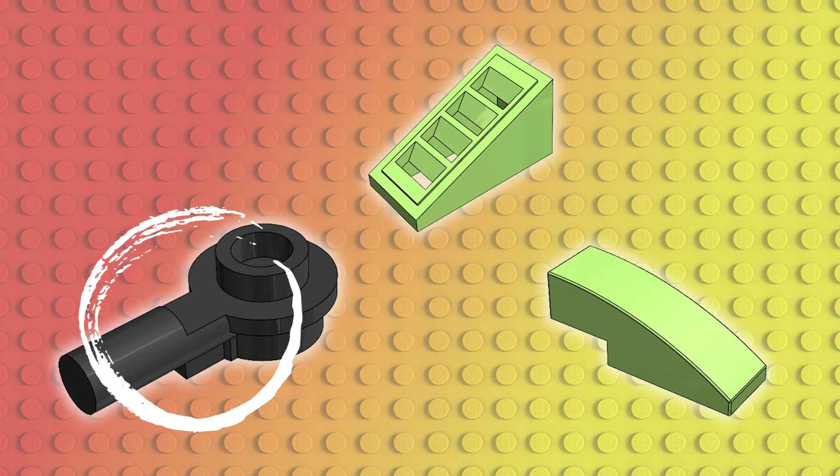Now in this lesson, we're about to tackle 3 parts. We have the black bar with a round plate and a hollow stud, a curved slope part 3x1, and another slope part, this time with a grill. I'll take you through how I modeled each of these components, 2 of them starting from scratch, and 1 with some simple changes to the starting geometry, but all the details after that completely fresh. All right, let's get started.

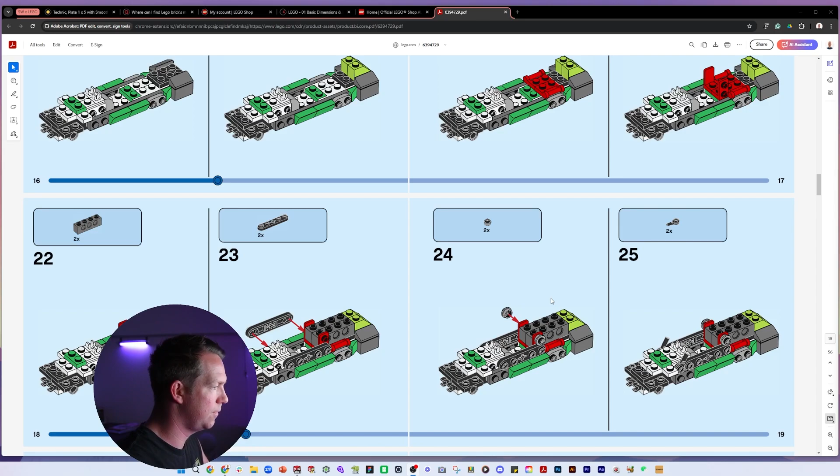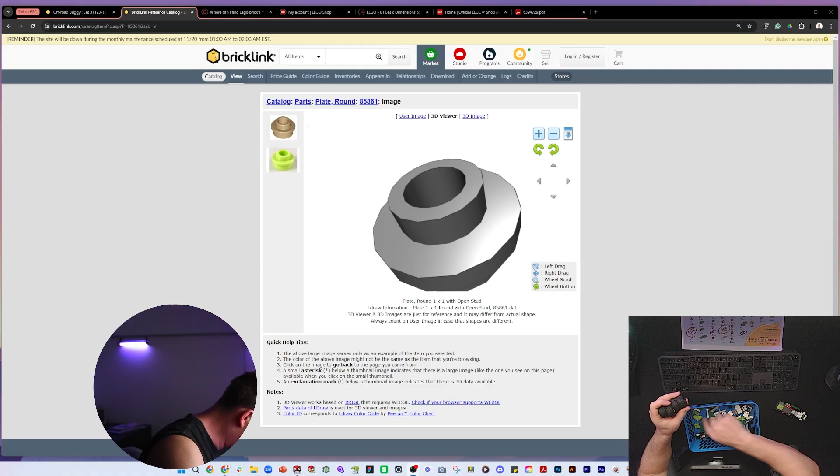Let's keep going, we're up to number 24, first time we've seen that kind of part. 6168647, plate round 1x1 open stud. Interesting, 1 by open studs, that's going to be the same type of part I think. Let's have a look here, small grey part, kind of clear, difficult to see. Still got a lot of parts to make. Good, all right, so we're missing a part. This one, I thought we had it originally, but this step 24, we'll have to go back through that big Lego pack and see where it is, because it's not here.

So we move on, next part, 25. It's a bar 1L, 1x1 round plate with hollow stud. I think we'll create this one from scratch, so let's get into it.

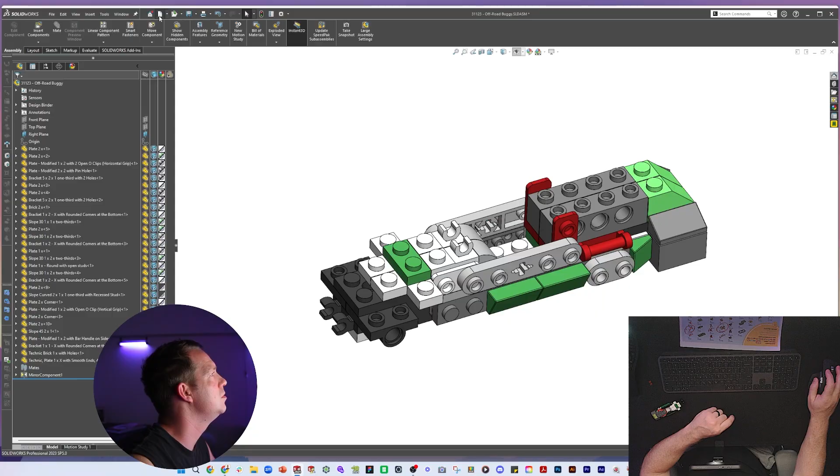I don't think we can use anything around it. We will just have a look at some of the details, we will see it's quite small. It's a round plate, it's got a normal brick on the top, it's got a little level here. And then it has a round end and flat join there with a little hole for a sink mark and a rib on the bottom.

So you can even see the part numbers on the inside. They are tiny, can we zoom in? Well, even that's enough to see the detail. Let's give it a model.

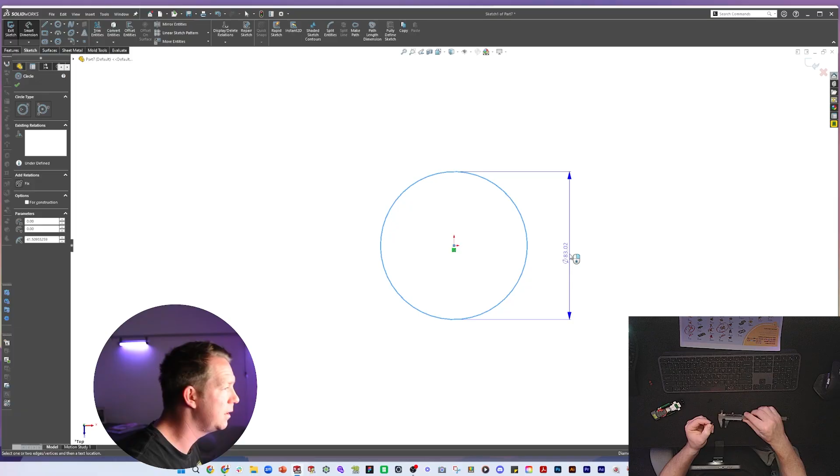So let's start on top plate, and we will use calipers to get the outer diameter right. Let's assume it's going to be 7.8 before we measure it. 7.8. So we drop that, 7.8. Now that's at the widest point, okay, but the widest point is only at the top, the top, the middle level. And the height of that is the usual 3.2.

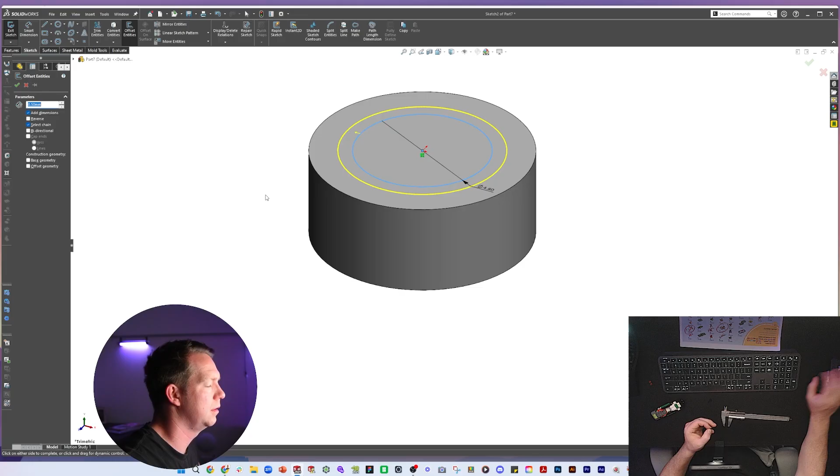So here's what we're going to do. We're going to go up 3.2. Let's do the usual brick element on the top. That is going to be 4.8, offset 0.8, extrude up 3.2. Was it 1.6? I forget. Let's check, 1.6, apologies, 1.6.

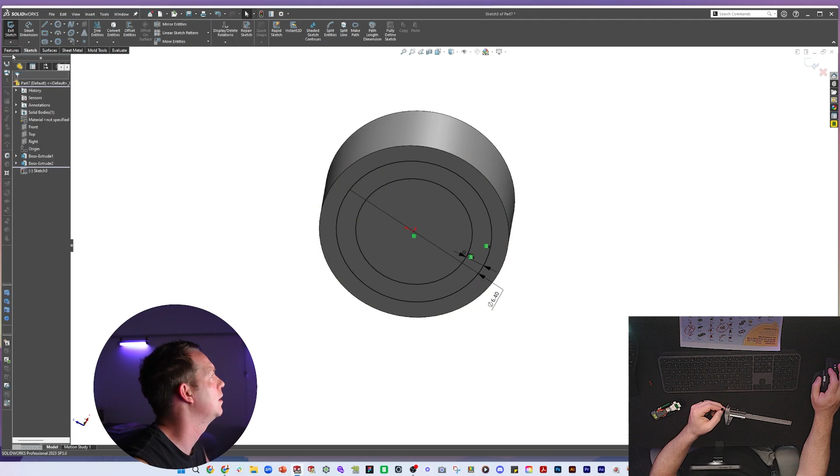Okay, now let's thin this out on the bottom. So the diameter of that round part is only 6.4, does that make sense? Yes, 6.4, and wall thickness, usual 0.8. Okay, so we're going to do some flip side cut here. We're going to go up to that surface and offset by, say, 1. So we will go offset from surface, 1, it's going to cut the inside and the outside for us at the same time.

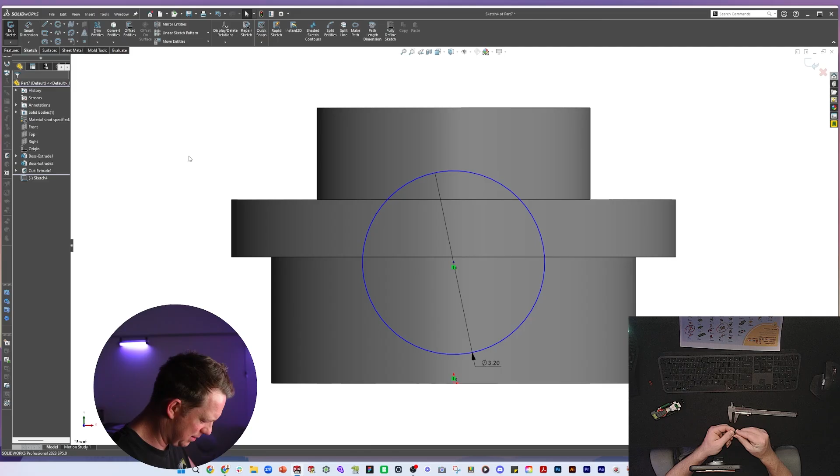Okay, now we'll do the additional round part. It has a diameter of 3.2. Don't know its exact height position, and we're going to struggle to measure that. Looking at it, we'll suggest it's kind of in the middle, so let's use a midpoint and drop that right in the middle. Now we're going to extrude that all the way out. It becomes 15.8, yeah, 15.8, that's neat, 15.8 from this very end here.

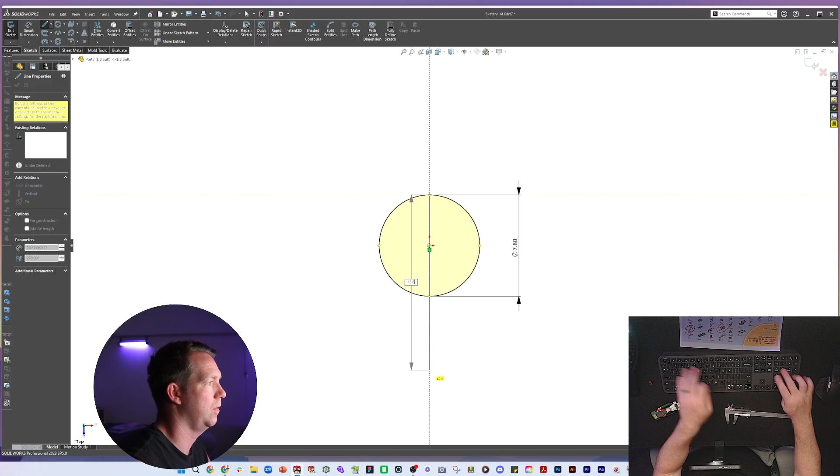So that's going to be a hard one to dimension. But what we can do is on this top plane, do a sketch to help us, 15.8, and make that for construction. So then when we do this extrude here, we can actually start it from the vertex, the end point, and we can go change the direction and go up to next. And I'll just go all the way in and then merge, right? It's a very neat way of just going from the outside, and now we can do the rest of the detail that we need.

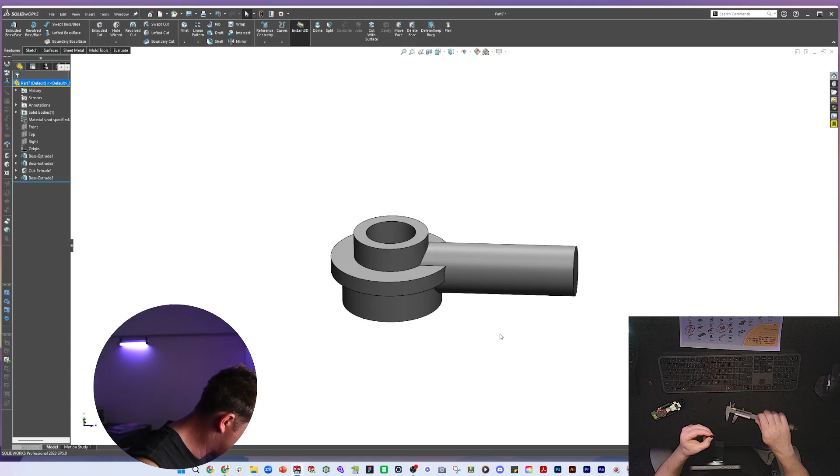So the flat section, for instance, on the top, that starts at what looks like 5.8 from the end. So we can do a sketch here, convert that edge, and draw another rectangle here with a dimension, 5.8. And let's use a contour selection. So this area, I'm going to go up to this surface.

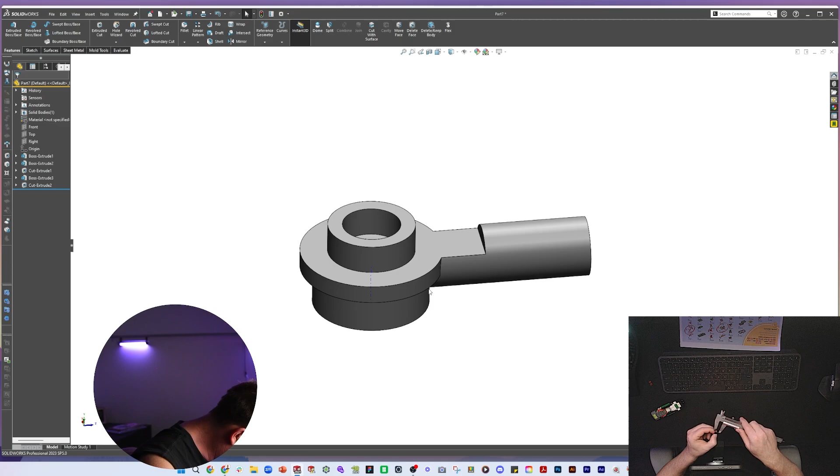Very nice. Here on the bottom, it's solid, except there's another little rib, very small. Rib is 1.8, 1.6 millimeter, let's say. It comes out a tiny bit, and there's also a little straight section. So on this bottom section here, let's draw that rib in. And what do we say? 1.8.

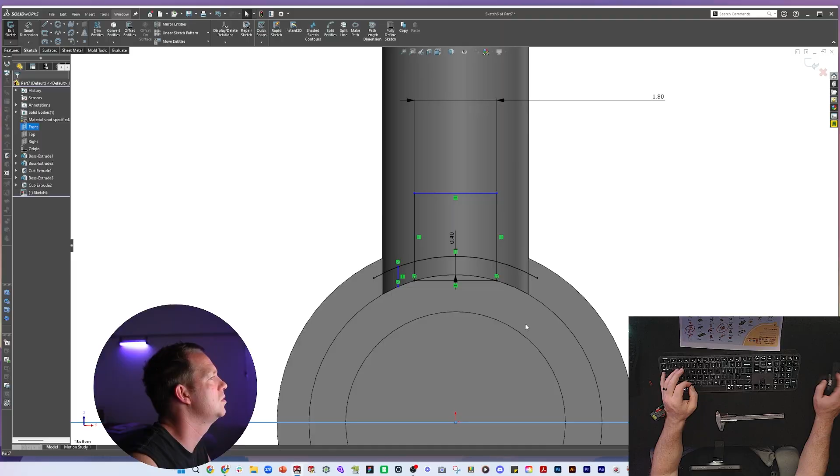Also a little bit of a thicker section just in the corner. This bit, let's offset that, 0.4. That's about right. And down here. These dimensions are too small to measure accurately, so instead I'm just going by eye because I want to get an approximate appearance.

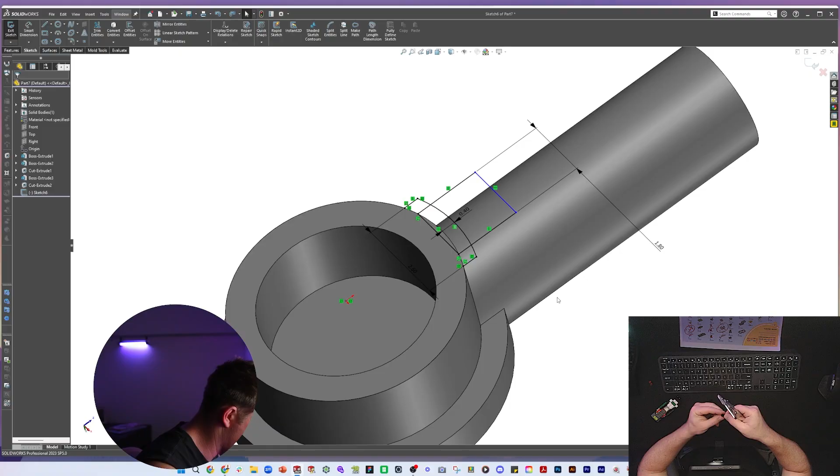Some edges that we don't need. I do want, there's a sketch there. There isn't. So I'll just add a round that goes through the middle. Don't like it and delete one. I'm just trying to do this without losing all dimensions. Close enough to 9.2 on the back side of this one. There we go, fully defined.

And let's just select some contours to use. This one, this one, this one, this one. There you go, go down up to next. Very good. All right, let's save. Plate one by one with open stud. Great. Save and insert. Those ones are going here.

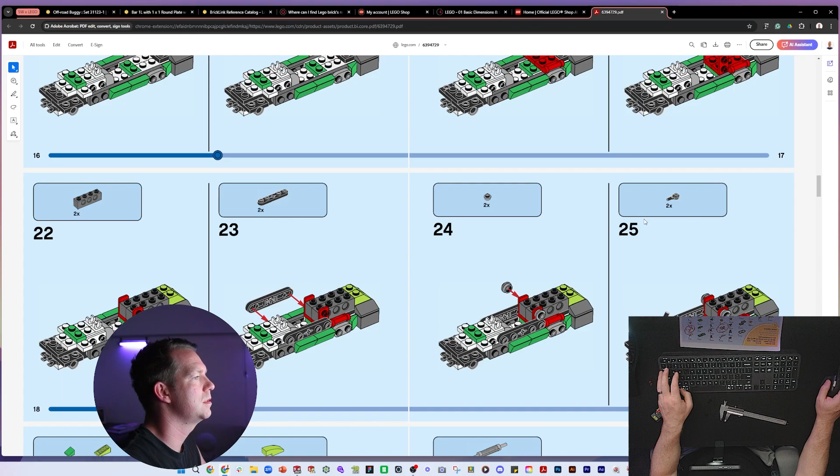Oh, next. Hi. Are we at halfway? No. But we're getting up to some repeat parts, so that's cool. Two of those green ones. So it's these little ones here. They're going on those corners.

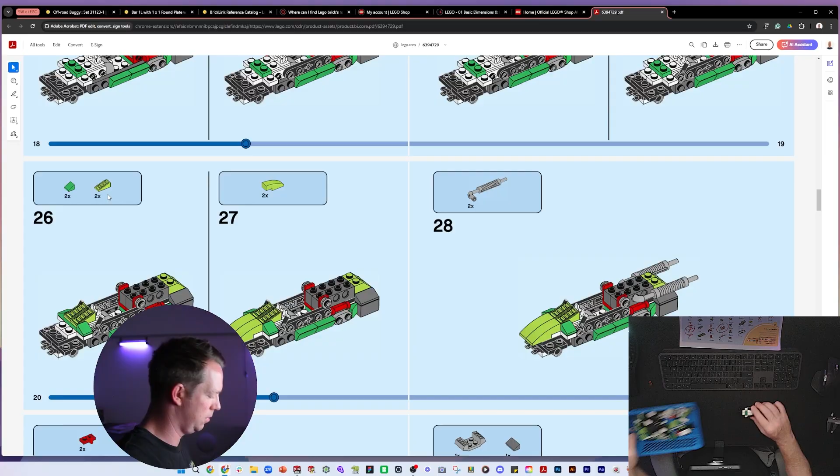And angled one with a lime slope with grill. Look, cool part. Definitely very cool part. It's got a very slight lip raised section on the top. It does have a similar shape around the bottom. You can see there's a couple of kind of pips on the inside, just raised areas. A few fillets on the outside too.

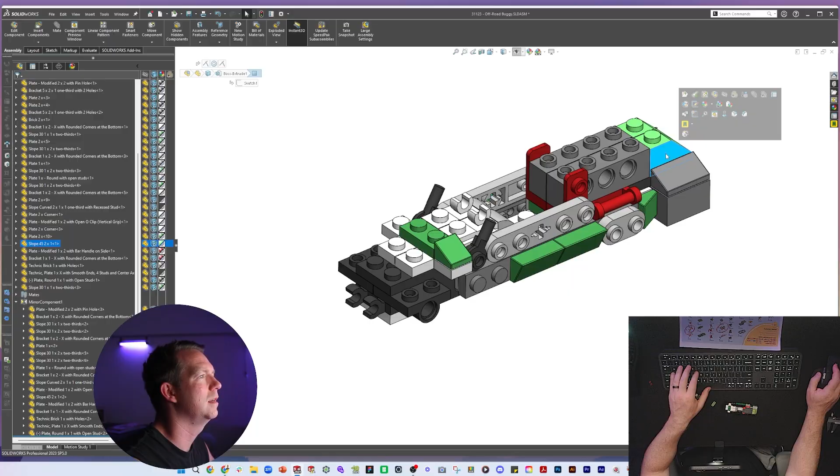Now this one, can we start with the other two slot part? Probably can, but it'll be completely different to the eye. So this one, I'm talking about this one here. It does give us the dimensions, so we can start with that. And we save a new file. This is called slope 18. Cool. All right, save as copy and open, and let's roll back to get the shape right from the start.

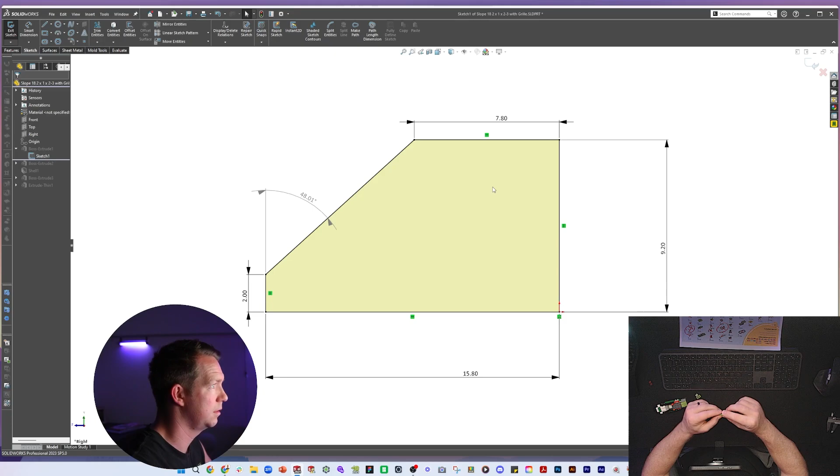So it's going to be this one here. Now our 15.8 is correct. Our front edge at 2 millimeters, it's going to be correct. This top face, which no longer has a flat section, that is going to change. So we're going to remove that and just join that one up there. That is pretty straightforward. Press OK.

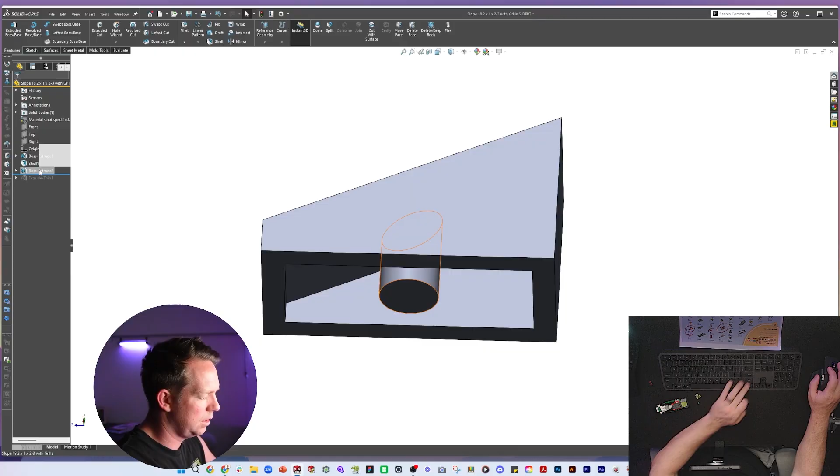Now in this version, it had a boss extrude here. We're not going to use that. We will do a complete shell and then do some cuts on the top. So it's a shell. Good. We do not have this detail. We can remove that. And we don't have this detail. We can remove that. All right. So let's start from the top.

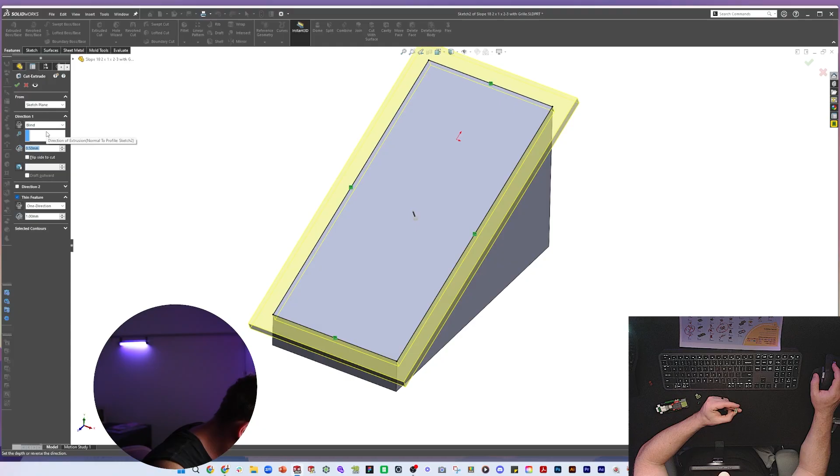Right off the bat, there is a very thin wall section that goes around the outside. So let's do a quick convert and do an extruded cut with a thin feature that goes approximately the distance that we want. And then our depth is going to be very small. I'm going to say it's only 0.2. I'm actually going to make this mid-plane so we know we cut all the way around. Okay, now we can do our slots.

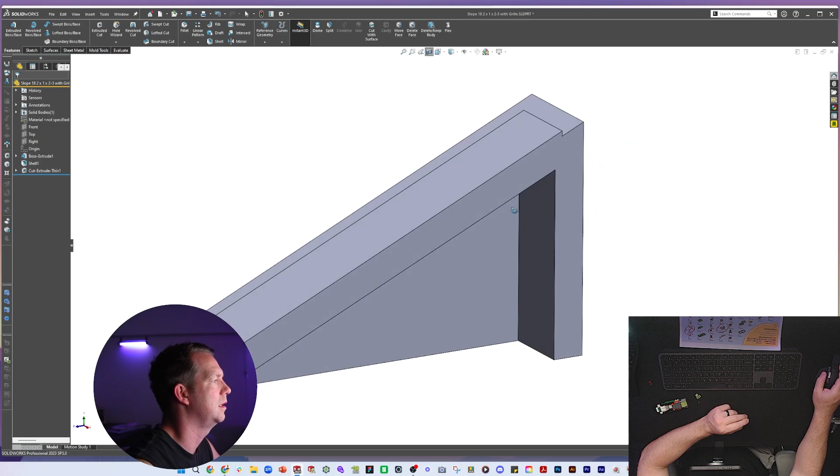Now our slots are going to go through the roof. And the other thing with my cut extrude, I need to change the direction so it's coming down straight like that. Okay, cut slots. These slots have an interesting sort of angular detail. We'll do a section view here. So they cut through at an angle like this and then come straight up along those lines. We're going to repeat shape and just move the sketch to match.

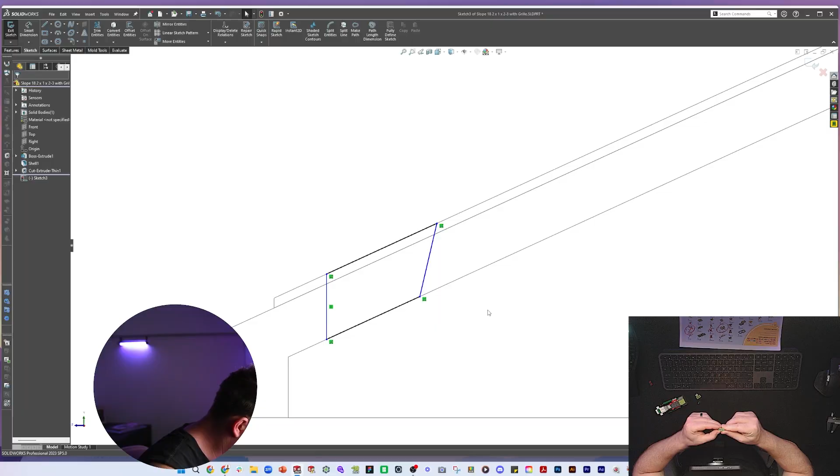Now the angle we would not be able to measure, but we can measure the gaps. So the small edge at the front, now 1.4, let's say from there to there, and then the gap about 1.4. So from here to here, 1.4. And then the angle on the top, we're going to have to guess. Like if there's any clear way of getting that perfect. 60 looks pretty good. Now there's 4 of these cuts and they all look the same.

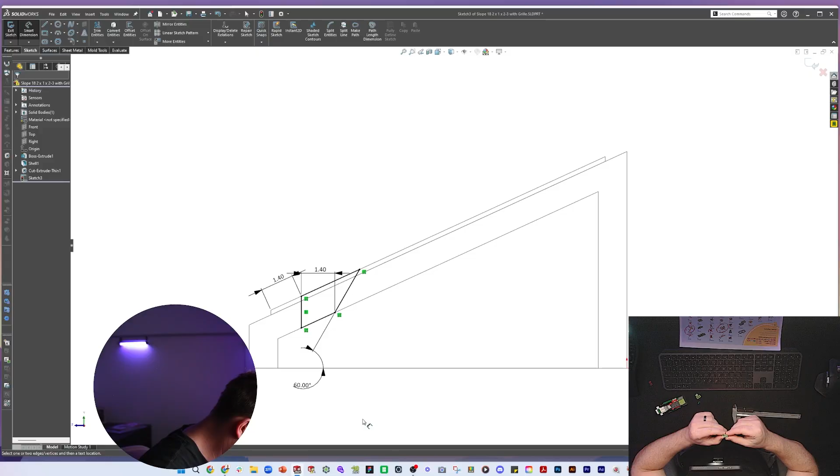So we're going to do a pattern, a linear pattern with a sketch up along this face. So we're going to go linear sketch pattern, but instead of x-axis, we're going to delete that, select this line. Then we're going to increase the spacing, increase the number to 4, and increase the dimension between them. We are not going to actually dimension this, or should we dimension the spacing?

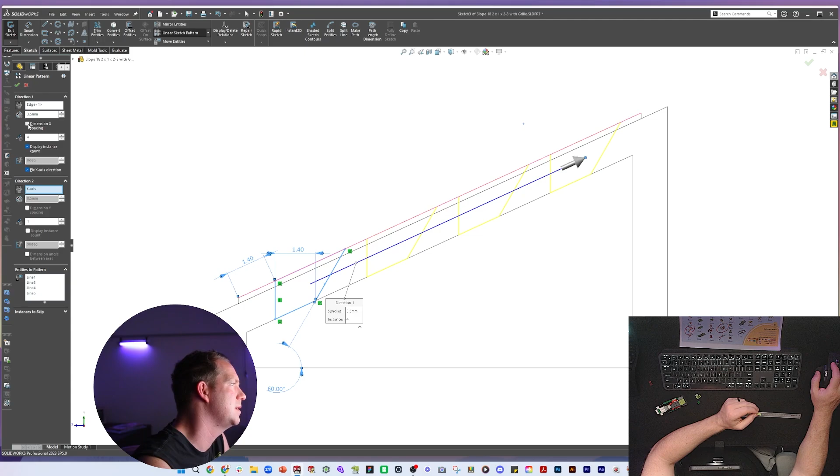No, we're not. We're going to press OK, because they are equally spaced, but all we're going to do is actually put a dimension in for the very last one, which from this edge to this point is about 3.2. Now that's our sketch. Let's do a cut extrude and see how it looks. I'm not yet convinced we've got it right. That looks pretty good.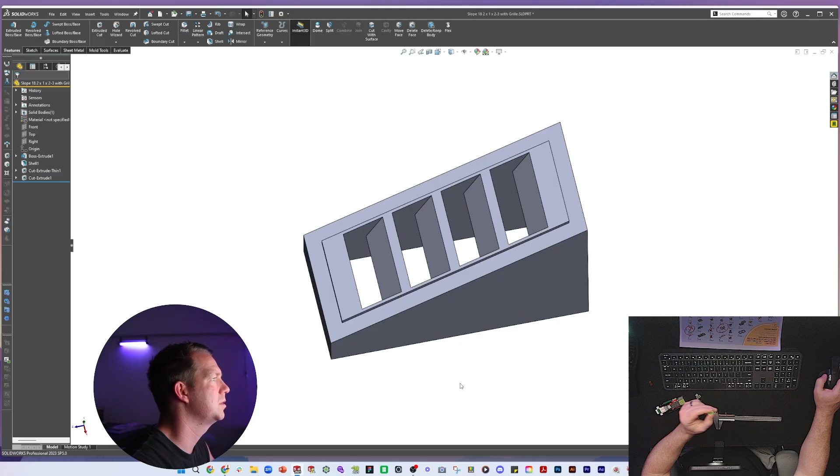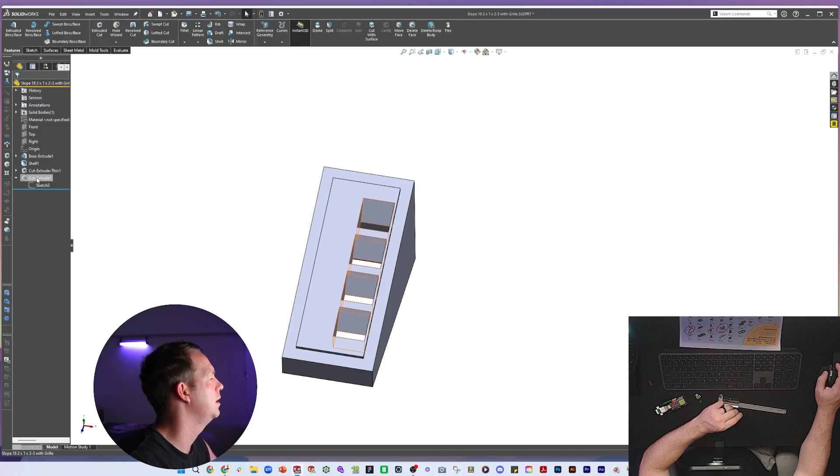Let's just measure the actual distance of the cut extrude, so the slot size, and I get a dimension close to 4.8. Now I'm measuring, I can see it's 5.4. So what I'm going to have to do is change that sketch plane to the right plane, which goes through the middle of the part, and then edit the cut extrude and change the direction to mid plane and put in my dimension. That way it'll be perfectly in the middle.

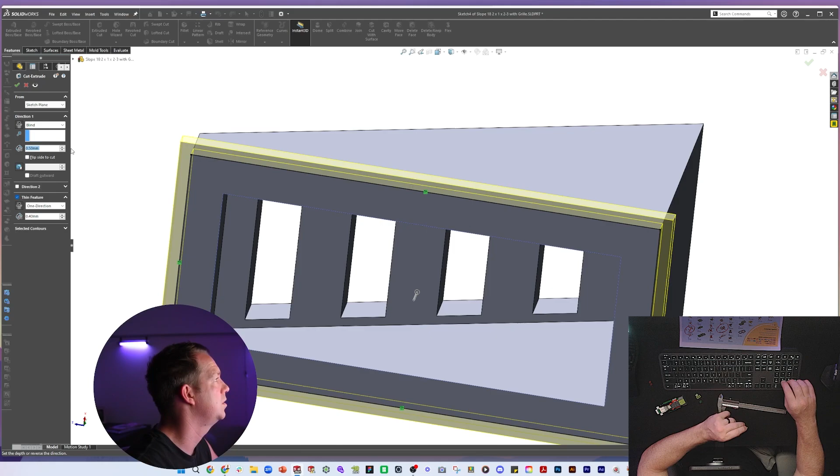The only other detail left is a similar lip on the bottom to the top. Let's convert that. Let's do an extruded thin cut. Let's do a thin feature. This time it's quite small, so it's 0.4. We go blind, again quite small, 0.4. Flip this direction, press OK.

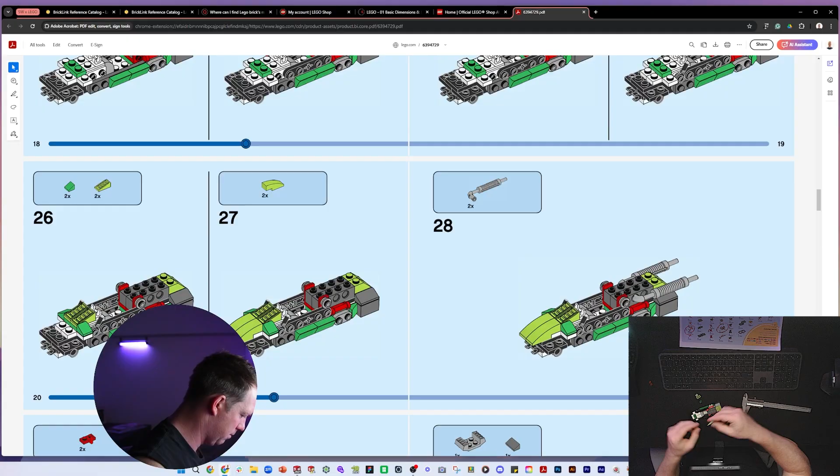And this one has a couple of small fillets. So we'll go through and just add a standard 0.5mm fillet to each of these corners. Press OK, and that is done. There's no way we can measure those little pips on the inside, so we're going to leave them. All right, now to assemble, these ones are on that front section. Okay, new part, a lime slope curved 3x1.

Okay, another new part, nice on the outside, sort of 3 blocks long, and a couple of ribs on the inside with a step. That's good. What can we start with to save time? That's what I'm thinking about now. Is there anything we've built that will actually help here? I don't think so. So we'll create this part from scratch.

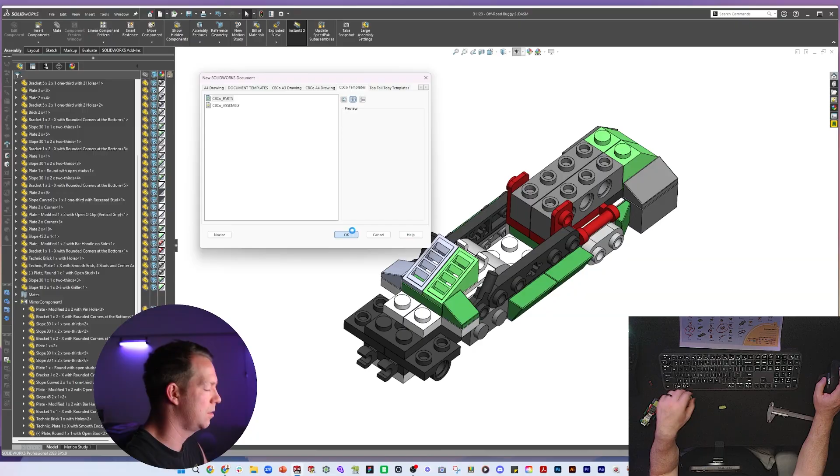So we'll start on the right plane. We're going to sketch the approximate shape that we can see. This is a curve. There's a little straight section at the front, and that comes back. So that's our approximate shape. Now to measure this, let's just do it a couple of steps at a time. So endpoint, 6.2. Our first dimension is going to rescale our object. Next dimension, overall height, 9.2.

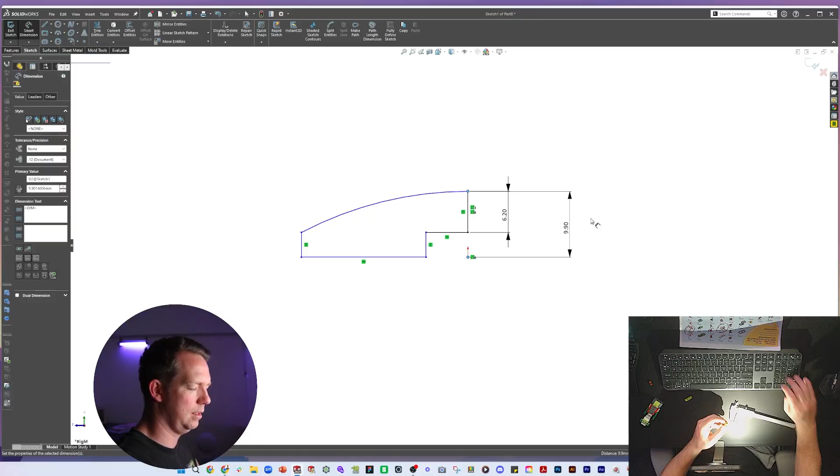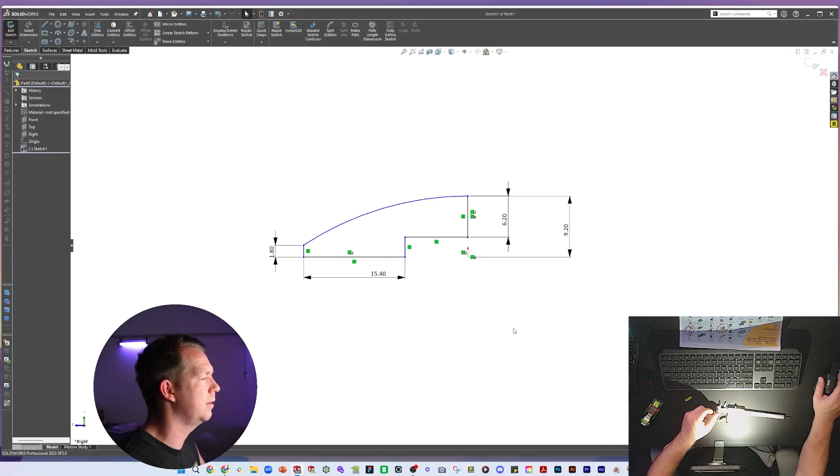You might find later that we tweak some of these dimensions. This flat section at the front, so here, 15.4. It's very small, flat at the front, just under 2. We'll leave it at 2. I'll go 1.8. Now we're going to make this line here coincident with the origin. Overall length, overall length, 23.8. Okay, and then we are fully defined. Our width, as expected, 7.8.

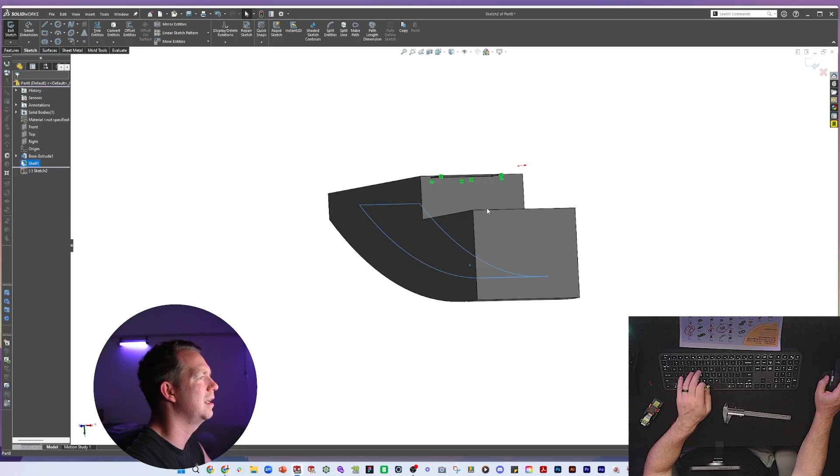All right, I'm going to extrude mid-plane for this one. Now, this part has a thickness thicker than standard, 1.6. We're going to do a shell and do a show preview. Press OK. And what we have to do is fill in this face between here and that upper face there with an extrude, up to surface, go back down. Okay, so we get that solid wall back.

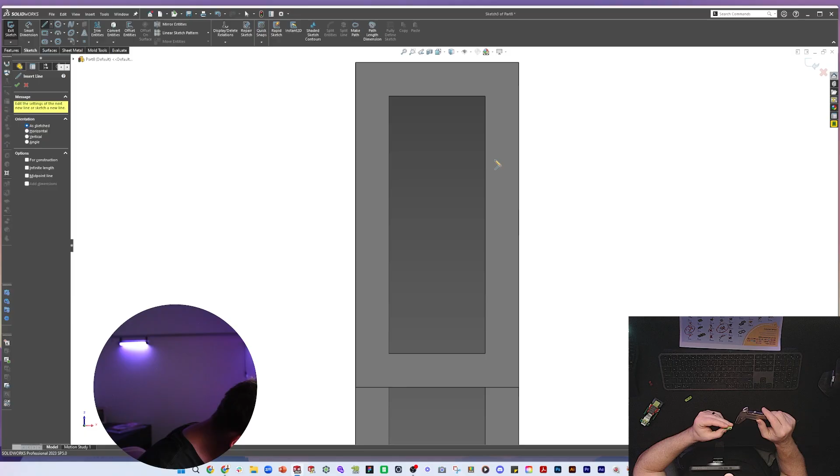And from there, it's some ribs. It's also a little flat on that front section. Not going to worry about that. Just going to do my ribs. Ribs on this one, quite small. And so 3.2 apart. And actually kind of round, 1mm wide. Can't tell if they're round or triangular. Put them in. Each of them can be 1mm.

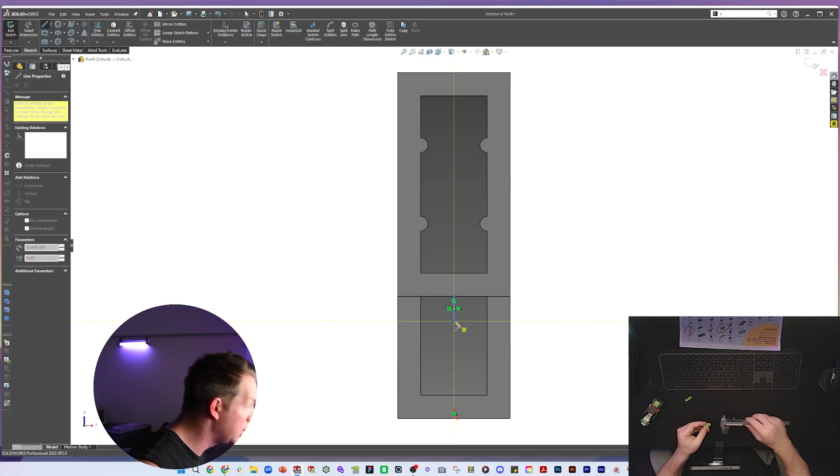We're going to mirror that around here. And then the 2 ribs outside to outside, 5.4. There again, it's on that side there. I'm going to extrude that all the way down, up to surface. And then on this face here, we have a small rib. I can't even measure it. 2mm. Extrude that, mid-plane, up to surface. That's about 1mm. Part is done.

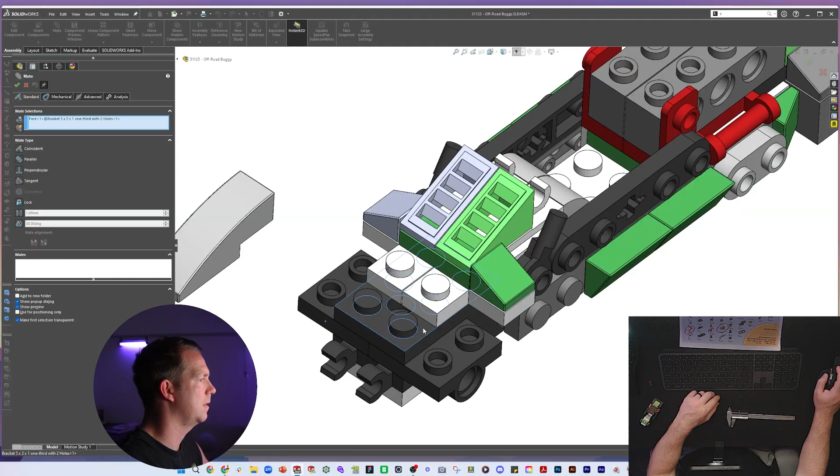Search for a couple of fillets on the outside. Let's put those on. Name of this part, slope curve 3x1. Very easy. Excellent. Let's chuck it in. Where does it go? On the very front edge. Now here's where we can find out if our dimensions were right. Let's sit the bottom one on this one and the outside face here. And is that in the right place? Sitting on top of the black here.

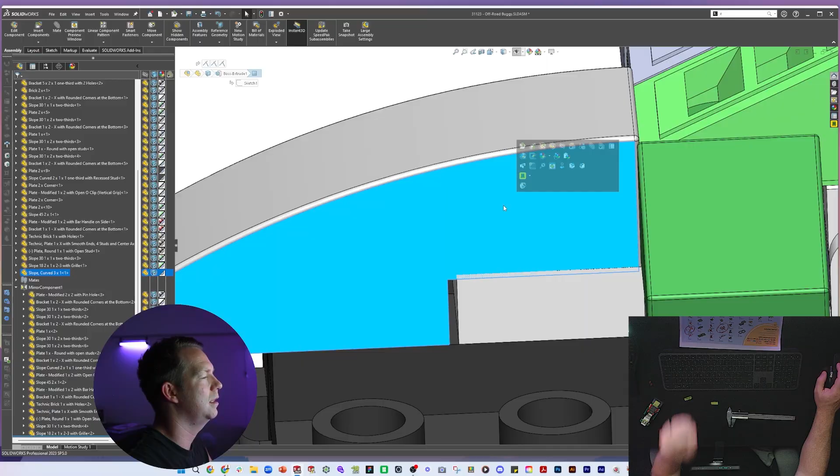So it comes back like this, so you can see our dimension's wrong. Our dimension is definitely wrong. We can move this one there, and let's edit this one in context. So I think it just needs to be a bit higher. Yeah, this would be 6. That's correct now, and then this gap is 10.6. I would say a little gap there. Cool. That was better. Don't forget the mirror.